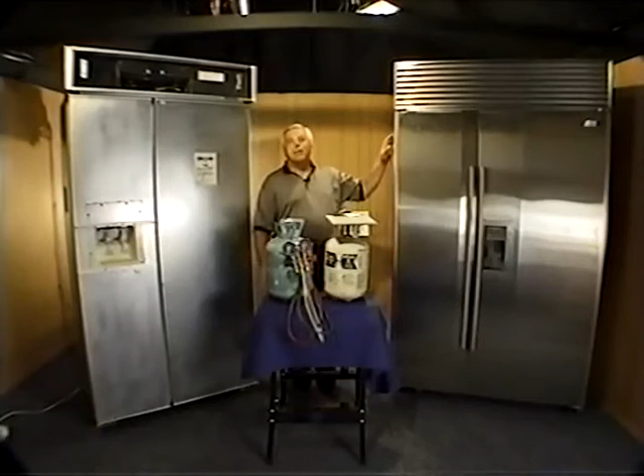Our focus this time around is going to be on built-in refrigerators. We're going to be using one KitchenAid model and one Sub-Zero model so that we can compare some of the similarities and some of the differences in servicing two different brands of built-in refrigerators. We're also going to be using one brand that uses a single compressor system and another model that uses a dual compressor system, so that here again we can discuss some of the similarities and some of the differences in servicing the two different models.

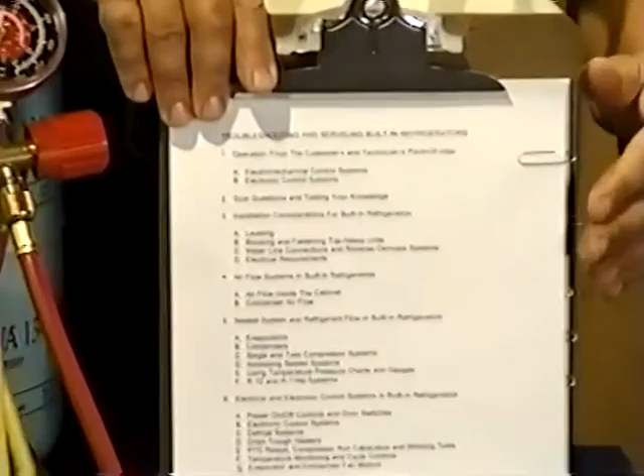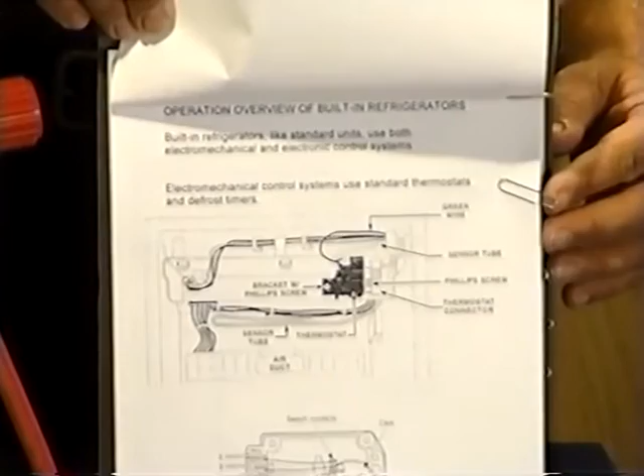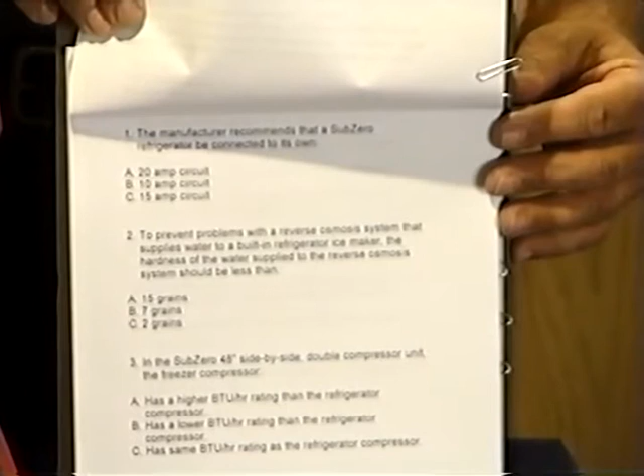We're also going to be using a resource guide that came packed with your video program. You'll notice in the resource guide that on the first page there's an outline that gives you the sequence with which we'll be going through the topics we're going to be discussing. You'll also notice in your resource guide that we're going to be using different kinds of graphics to discuss electromechanical and electronic control systems. Also in your resource guide, you'll see that we have a series of quiz questions. The way we're going to be working with these quiz questions is we're going to be presenting them at the beginning of the program and then again at the end, so that you'll have an opportunity to assess your skills both at the beginning and the end of our training program.

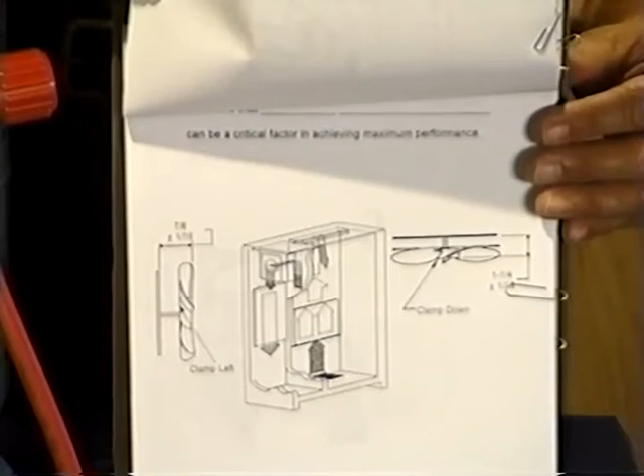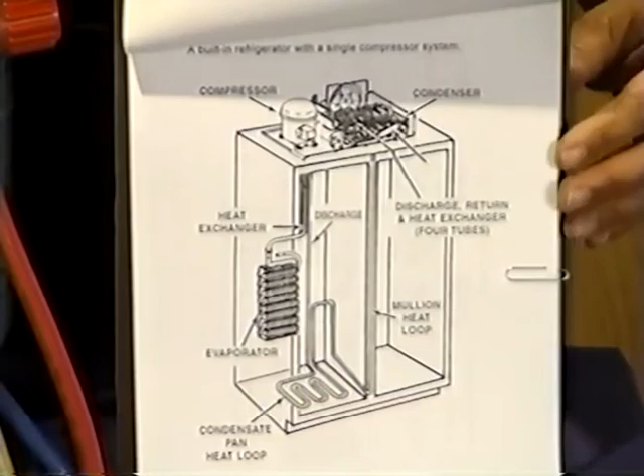Also in your resource guide, we're going to be using graphics and illustrations to talk about important considerations like airflow in built-in refrigerators, and also talking about some specific fan spacing considerations that some manufacturers want you to understand. And as we said, we're going to be talking about sealed systems in built-in refrigerators. And we're also going to be using wiring diagrams so that we can talk about troubleshooting some of the electrical situations that you may run into when servicing built-in refrigerators. So that's the way we're going to be getting it accomplished.